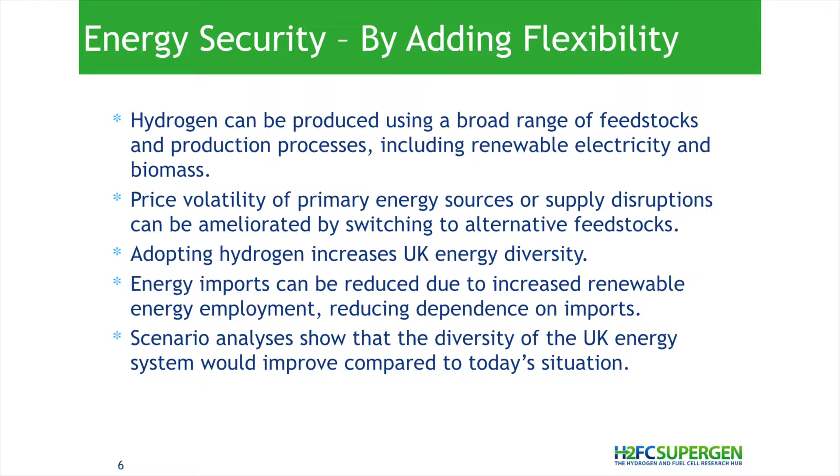So that's important, because you'll see on one of the next slides how hydrogen can become something like a central node of the energy system, energy infrastructure. And now you have different ways of feeding into this. So you can take anything from electricity to natural gas, crude oil, by partial oxidation, lots of other things. Could be renewable, could be non-renewable. You could be employing CCS or not. You just get a selection and a choice you didn't have before. And a lot of these energy sources, if you look at the renewable energy, of course, will be indigenous. So you rely on imports much less than you do today.

So although the UK has access to gas and oil from the North Sea, I mean, when Scotland leaves, that's gone, so England won't have these resources. But even so, that's dwindling away. So even if we used enhanced oil recovery, within the next 20 or 30 years, this will be gone. So on these timescales, we have to look at what happens then.

And renewable energies, of course, are harvested within the country. And that also has implications, as was hinted in the previous talk, on the national economy, plus then the price volatility on the world markets you don't have for renewable energy. So that's a long-term securing of cost.

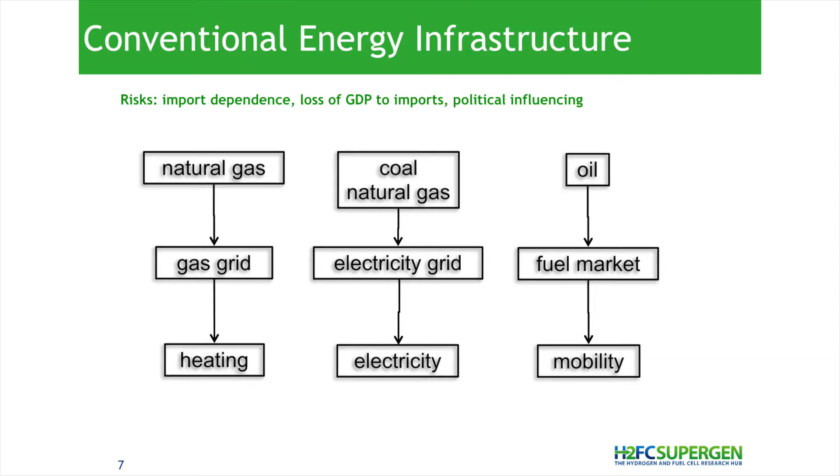So this is what the current markets look like. It was mentioned, but not shown as a graph before, so essentially we're closing circles here. There's completely separate markets for gas, which you could say heating. Some of the gas, of course, also goes into electricity supply, more so in the UK than in other countries, less coal. And then we have a completely separate market for transport fuels. Of course, especially in the UK, there's quite an overlap. There's quite a lot of electric heating. Very inefficient, but very cheap to install.

And the future system could look like this. So essentially, hydrogen can supply all of this. So you could feed lots of different sources into hydrogen, and from this hydrogen supply chain or infrastructure, you could feed the heating market, the electricity market, and the transport market.

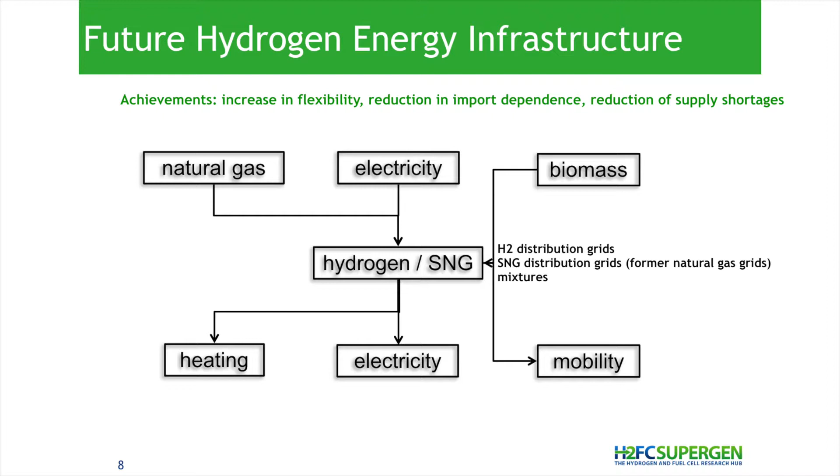One thing to point out here is we're not only talking about hydrogen, we're also talking about synthetic fuels or synthetic natural gas, because we can turn hydrogen into methane. So we can have a methanation, and we can produce synthetic natural gas out of hydrogen. That's one of the beauties of using hydrogen, because it has these electrochemical conversion pathways.

So we needn't even turn all of the infrastructure into a hydrogen infrastructure, which would not be totally impossible, because a lot of the infrastructure comes from the times where we had town gas, which was 50% hydrogen. So implicitly it was built for a hydrogen economy, if you like. Not all of it. So there's been several projects, especially at EU level, looking into this. So, for instance, roughly 10 years ago, they looked into this and found that there are some issues, but they

can easily be overcome. So we could also turn the hydrogen, at least in places, into synthetic natural gas, feed that into the grid, and reuse the infrastructure as it is today. So the investment on changing the infrastructure would be zero. The investment goes into the conversion of the hydrogen.

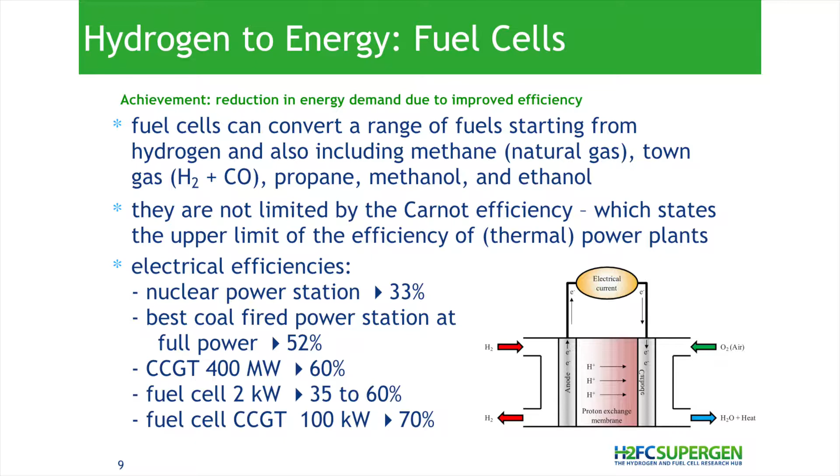Now, one thing that has been mentioned, but maybe let's look at it at a more technical level here. The complementary technology to hydrogen is fuel cells. So a fuel cell will turn hydrogen into electricity and heat, electrochemically, no thermal process involved, so we're not limited in efficiency. Any thermal process, so any steam turbine in a thermal power station, including nuclear, is always limited by the Carnot efficiency, which essentially is a function of the temperatures.

So the higher the temperature, the better the efficiency, and the lower the temperature you reject to, so essentially the environment, the better. So you can only achieve 100% efficiency in a thermal power station if you work between the sun and the universe. So 6,000 Kelvin versus 0. Obviously that's not possible on Earth, so we're stuck with something like 56%. And a thermal power station or any thermal machine, engine, whatever, is not able to surpass that.

The fuel cell is not limited. So theoretically, if we incredibly improved the materials, we could go up to anything above 90%. I wouldn't say 100, but theoretically there's no limit. So even a very small fuel cell system of 1 kilowatt or 2 kilowatts, so a system you put into a house, has the same electrical efficiency as the best combined cycle gas turbine station, 60%.

So we work on a totally different scale, and we can bring this very large unit, high efficiency, into very small applications. And the fuel cell is based on membranes, so if you want more power, you just increase the surface, whereas a thermal power station is based on volume, so you only get the very high efficiency if you have very large power stations.

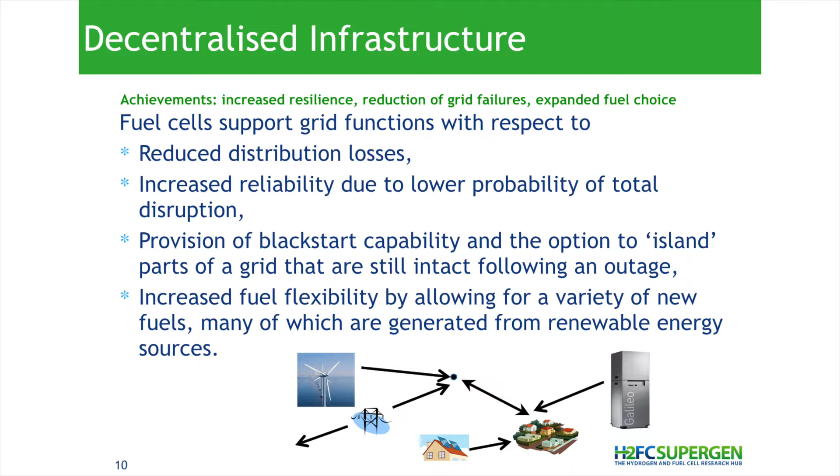Now the other thing is, if we have these very small units, we're sort of bringing down the electricity supply, or energy supply if you like, from the level of very centralized units. So you always have these gigawatt units because you want the high efficiency, or at least half a gigawatt or something like that. We bring the same level down to kilowatt level, or anything above that. So we sort of fill this gap.

And then, of course, if you have 1,000,000 1-kilowatt units instead of a gigawatt centralized plant, you're distributing that all across the country, so you reduce the distribution losses. So that's the same philosophy you have behind the micro CHP today, just a small gas-driven engine or whatever. You can do the same with a fuel cell at higher efficiency. So a small gas engine CHP unit would have something like 30% efficiency, and we can double that.

A distributed system inherently is more robust or resilient. If there's any disturbance, it can restart again more reliably. So it's like a swarm. And you can also install what you call black start capability.

So if a high-voltage line, a major transmission line fails, for instance for weather, so if you have snow and ice on the lines, they break, you get a large area of the country blacking out and disconnected from electricity supply. And with distributed generation, as long as it gets a 50 hertz signal from somewhere, so it can start with the grid frequency, and that can be implemented, you can restart the grid from these distributed units, and you can sort of block off single parts of the grid.

The easiest bit is you can supply single homes. So as long as there's still a fuel supply, which also is a risk. I mean, if electricity fails, mostly you'll also have the gas grid failing because of the controls still running on electricity. Not always, but sometimes.

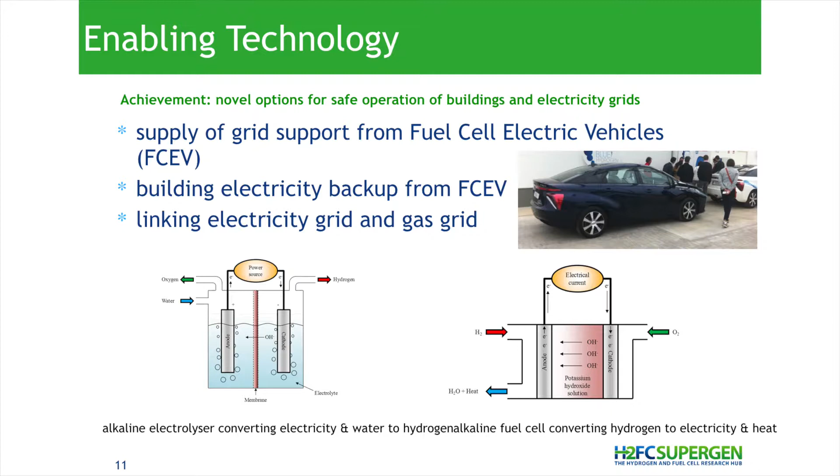Now there's also an enabling aspect. So once you have a fuel cell on an electric vehicle, you have a tank with hydrogen, you have an energy vector, a fuel, if you like, a fuel tank. You turn this fuel into electricity on the vehicle to drive it or extend the range, but you could also use it as an electricity generator. So essentially you plug your tools, if you're a workman, or you plug your house into the vehicle and it gets supplied from the vehicle.

Something you can't do with a normal vehicle. So it's adding a new aspect to the energy system. So again, you could see this as an uninterruptible power supply or backup power for buildings. So even if you don't have a micro CHP plant, you have a fuel cell vehicle, the grid fails, you plug in your vehicle, and roughly you could run the house two days off the vehicle, maybe 3 days.

So the other aspect is linking of the gas and the electricity system. You can turn electricity into hydrogen. The hydrogen you could feed into the gas grid, and this hydrogen or methane, if you like, you can take out of the gas grid and produce electricity. So essentially you're linking the two.

But there's also another aspect. You can reverse the function of a fuel cell and it turns into an electrolyzer. So electrochemically, it's just the reverse process. Thermodynamically, they would be in balance, so you just sort of switch around from producing electricity to consuming electricity, so driving the fuel cell, and it would be an electrolyzer producing hydrogen from water.

Now theoretically that's possible at a low temperature range, so if you look at the low temperature fuel cells, the typical polymer electrolyte fuel cells, it does work, but it doesn't work too well. If you look at the higher temperature fuel cells, like solid oxide fuel cells, they work perfectly. So essentially a solid oxide fuel cell you can drive forward, backward, and it works fine. So we're still looking into how long this will be the case, but at least for a year you can actually do this. So you have the same device that would be producing electricity from hydrogen or methane, and the same device that in reverse can turn the water that is produced into hydrogen.

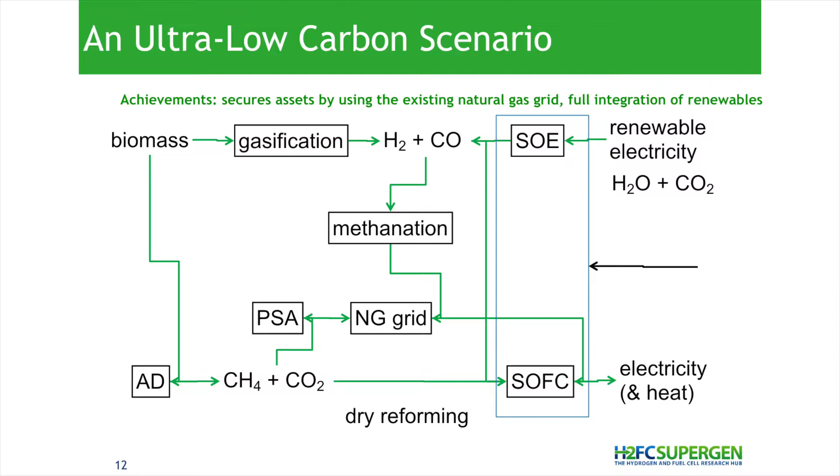We can take water and carbon dioxide, turn that into gas, and turn it back into water and carbon dioxide, and use the atmosphere as the storage, and the same on the left. So the water and carbon dioxide goes into biomass, slightly different time scale, and comes back into the system as energy. So essentially we're using the atmosphere as the storage, and we have an electrochemical cycle on the right side and photosynthesis on the left. So we have a complete zero carbon energy cycle. The only fossil energy, if we still need it, is in the first instance for making all the appliances we need here.

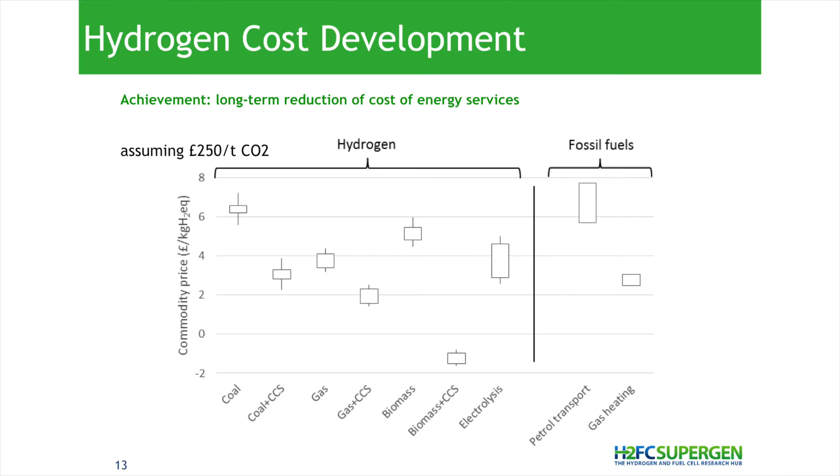Now, what's the cost of all this? So Paul's been going into the details of this. I'll be coming back to that on the next slide also. Cost is a bit tricky. Everybody thinks they know what cost is, but if you drill down to what actually is wrapped up in this, it gets a bit more difficult. So this is a model looking into what the cost of hydrogen production would be if there was a 250 pounds per ton carbon dioxide tax.

It's relatively obvious if there's no carbon dioxide tax, hydrogen will be more expensive because the environmental benefit we have by only releasing water by burning hydrogen is not valorized in any way. Nobody's paying us for that. So obviously it has to be more expensive. But if you take this into account, you see there's one negative value here: if you take biomass and you use CCS, if that ever comes online, you're actually earning money. So hydrogen gets cheaper because it's avoiding more carbon dioxide and you're cashing in on the carbon dioxide tax.

And the fossil fuels don't come out cheaper. Normally they'd always come out cheaper because they're available, there's lots of tax credits, and they're not paying the full cost of service that we see at the moment. So in this case, when the carbon dioxide emissions are taxed appropriately, the picture changes, and hydrogen is completely competitive.

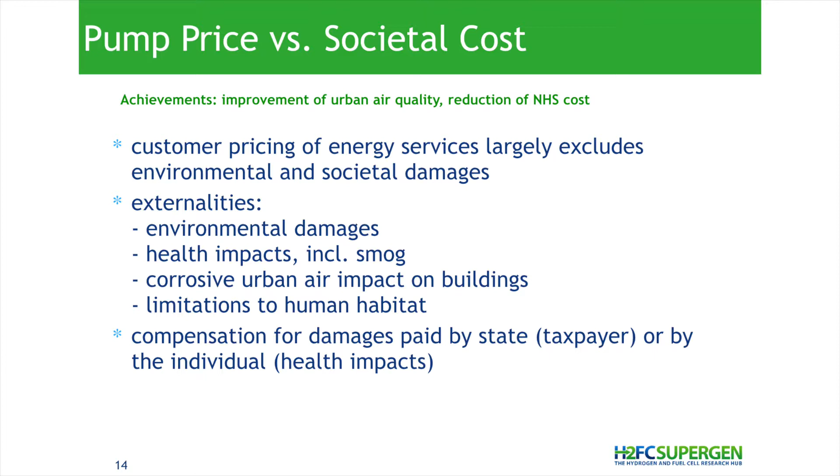Now, what is in cost? Normally, you just have the pump price, as you call it. Pump price is what you pay at a petrol pump, what you pay for energy services. And this is just the cost of supplying the energy by all the companies along the supply chain. But there's a lot of cost connected to the usage of the energy. For instance, if you take the example of a vehicle, there's all the emissions of carbon dioxide, sulfur dioxide, NOx, particles, whatever. There's mercury from coal-fired power stations, radioactivity from coal-fired power stations. Smog in larger cities like London.

If you actually put price tags on all this, like 19,000 premature deaths per year or something like that, the picture changes. And those are things that are not paid by the driver of the vehicle. They're paid by, let's say, society. As is said in this country, there's no such thing as society. Let's say the state, the nation pays this, the taxpayer pays it, and we pay it with our own health. So those are costs you call externalities.

They're not in the market price, but they belong there, because hydrogen fuel cell technologies don't cause a lot of these. So if there's just water released in the city, you won't have the smog in the city. You might have the emissions in a different place where you're producing the hydrogen from natural gas, but it's not concentrated at the point of use. And then, of course, you can also produce the hydrogen from other sources.

And this is real money, it's not fancy. With health, you could, of course, argue, and there are differences. So in the US, life has a different value than it does in the UK. I think it's a factor of 100 more.

So it's £20,000 here, and it's $1 million in the US. But a lot of the cost is actually taxpayer compensations, and it's cost for all kinds of things that we pay in one way or the other.

And then of course there's some variance in the external costs. It will differ whether you're in London or somewhere in the Highlands. But if you take this view, cost has a different meaning. And as we're talking to policymakers here, this is essentially the view you have to take.

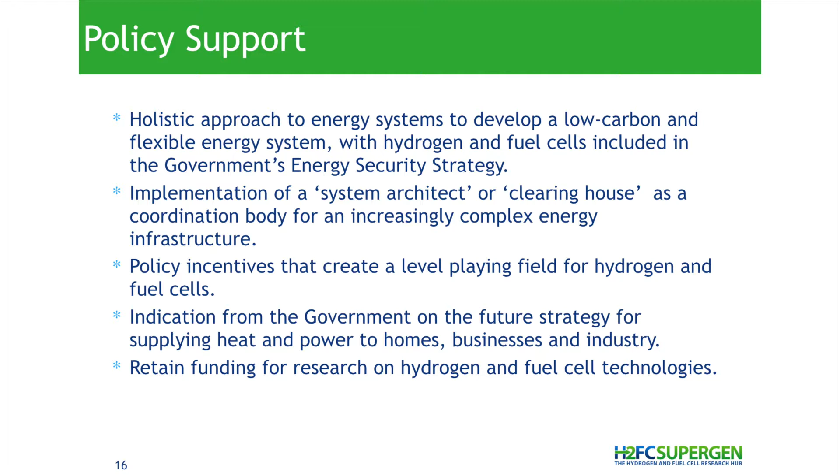Now just summing up things slightly, what we see here is a much more complicated system than we have up to now. It's very simple in that we have this hinge of hydrogen, but all the input and output is much more complicated. The flows are more complicated. You can get the input to the hydrogen from all kinds of different sources. So we envisage there has to be somebody who oversees this, not in the sense of regulation or more state control, but in the way of coordination.

So if it's not clear whether the market signals, we need more hydrogen for this and that market, actually translate into we have to produce it from this or that source, probably there has to be somebody who has an overview, like National Grid, who actually is a broker. It could also be like an energy exchange platform. We call that a system architect or a clearinghouse. It's not more state control, it's just about coordination and the optimum energy flow in the system.

It's a more flexible system, so you have to look at more aspects. You have to look at more than just the heating market or the transport fuel market. You have to have a more holistic view. We need this level playing field, so we need some way of embracing the external cost. There will be a lot of investment. Typically in renewable energies, you invest a lot upfront, and then you have 20 years of essentially no further costs. So you have 20 years of stability of energy prices, which you don't have with fossil fuels, obviously.

If you want to invest into this sort of future, you need a clear strategy by the government that this is the framework you will be working in. That's what the studies at EU level have been achieving. Essentially industry said, we have a study, the McKinsey one. The only thing we want from the EU is a clear regulatory framework. So we will not put any obstacles in the way of hydrogen fuel cells for the next 20 years. So industry, you can invest and you will not have any changes in the game.

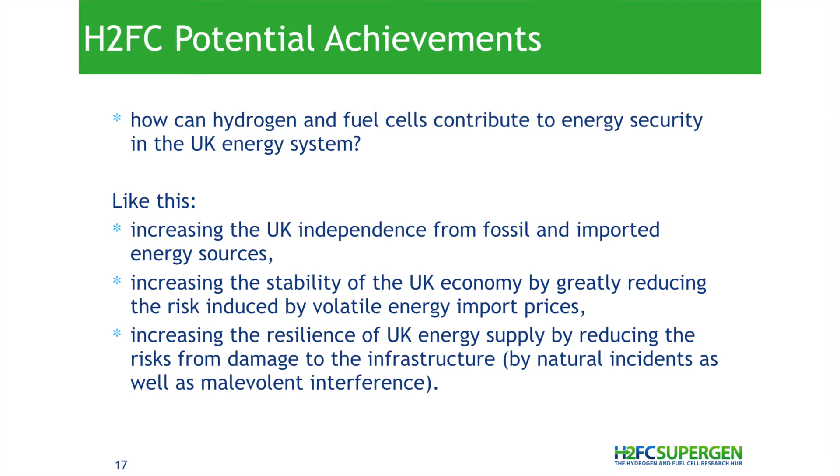So just to answer the initial question, how can we contribute with hydrogen fuel cells to energy security? There's definitely an increase in independence of energy imports. Energy imports also translate into exporting your GDP. Money earned here is exported to wherever oil and gas come from. You stabilize the economy by not exporting your income.

And of course, by not relying on imports, you're also politically much more independent of the other parts of the world that may want to take some influence. Think of natural gas increasingly coming from Russia in the EU, and that will be fed through Holland to the UK. And then of course you are under the threat of being blackmailed by all kinds of interests.

So there's the authors, and well, open to any questions.

Well, thanks very much, Robert. We've got a question straight off here and another one in the front, so that's good. Depends on the question. Depends on the questions.

Well, it's Robert Evans from Cenex. Very good presentation, very thorough piece of work. Can we refer back to slide 16? So there were two bullets here, the challenge from other sectors and the learnings from other sectors, that the third bullet down and the final bullet are unfortunately mutually incompatible. So it says the policy incentives that lay a level playing field for hydrogen fuel cells and then retain funding research on hydrogen fuel cells.

Well, maybe they're not compatible, but the challenge that other sectors have had is that government has provided policy incentives, but policy incentives are necessarily short-term and government can't make commitments for them, and they come and they go. So it's really, really difficult to say the intent of the third bullet is to have a policy that is a level playing field for a consistent period of time, because it's the stability that industry needs. But the problem is that the stimulus support that comes in, by definition, that the sector also needs, is very spiky and chops and changes and can't be so easily relied on.